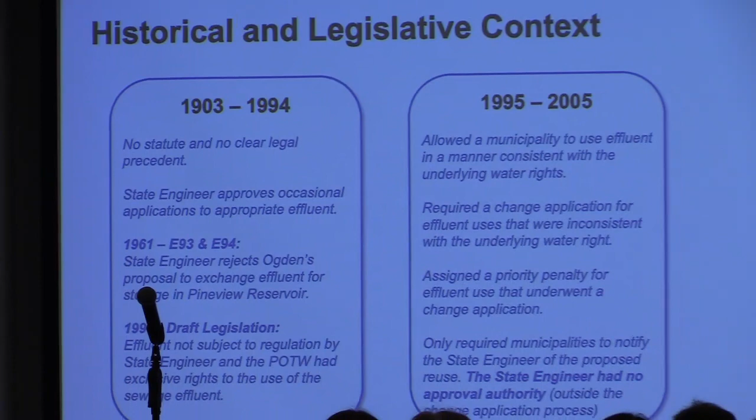If they wanted to do something different, if it was water that was coming from the underlying water right for a different use, they would have to file a change application. An interesting element of this law is that it actually assigned a priority penalty to that effluent use based on the date of the change application, if a change application was needed.

But the most important aspect of this is the state engineer had no authority to reject or approve these. It was simply the municipalities providing notice to the state engineer that they intended to do this, and then the state engineer simply published that notice. There was no authority for the state engineer to approve or deny anything along those lines. And that held in place up until 2005.

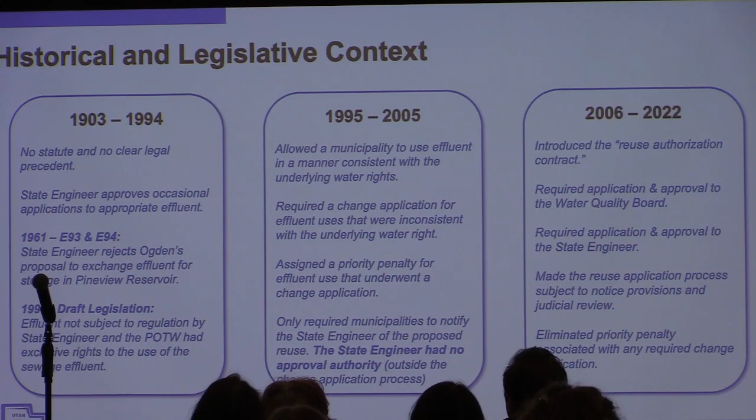So in 2006, a new reuse statute was implemented. It introduced this concept of a reuse authorization contract, which I'll discuss in a later slide. It required application and approval of the Water Quality Board at the time, and it required application approval by the state engineer. So you had two state agencies who were involved in the approval of these reuse applications.

It made reuse subject to the provisions of the typical application processes that the state engineer usually associates with appropriation, where they apply, the state engineer makes a decision, there can be reconsideration requested and go to judicial review. And then it also eliminated that priority penalty if there was a change application and simply just omitted that language.

So we had that from 2006 all the way up through 2022. And then the last legislative session, we had some pretty significant changes as a result of some of the things that were going on within the Great Salt Lake Basin. So a lot of the statute that we presently have evolved as a result of the discussions of that legislative session, where the Great Salt Lake was the key element that people were concerned about.

So some of the few changes: one, they changed the approval authority from the Board of Water Quality to the Division Director of the Division of Water Quality. Of course, I'll let Director Mackey address his role in that in a subsequent presentation. It did add an exception for reuse by industrial facilities. And then probably the more important provision is it prohibited both the Division of Water Quality and the state engineer from approving reuse applications that were filed in the Great Salt Lake Basin, with a few certain exceptions.

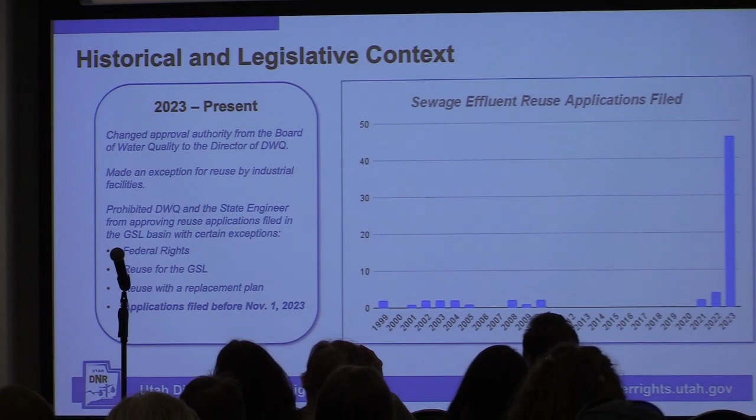So you can only imagine, here are the number of sewage effluent reuse applications we've received since the dawn of time. You can see it held pretty close to zero for most of the 20-year history, and then in 2023 we had about 46 of them.

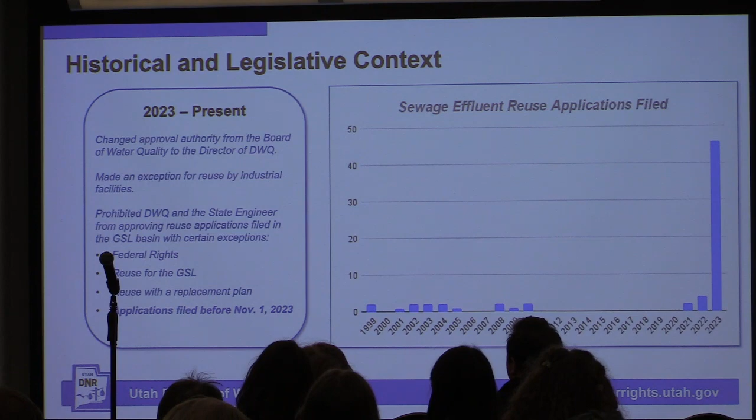So when I talk about incentives, you can see that there was an incentive for a lot of entities who may have had reuse on the horizon, but saw some of these provisions coming into place and saw that this might not necessarily align with how they intended to use that effluent. And so they all filed for reuse applications prior to that November 1st deadline.

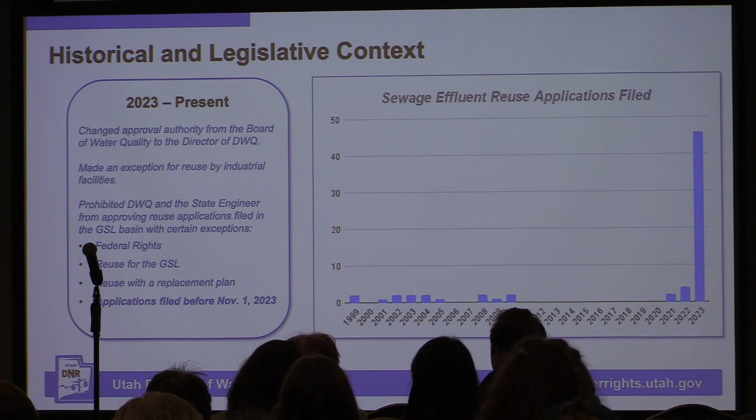So I'm going to walk us through the statutory provisions as it currently is today. This might be a little bit dry, a little bit more technical, but I'll try to hit the high notes on this, okay? And I'm just going to take it section by section.

All right, so there's a lot of definitions in section 102. I'm just going to touch on a few of them. First is the publicly owned treatment works. This is something that's been in definition for a while, it's also in definition in water quality statute. But what I want to key in on here is it's publicly owned treatment works, so these reuse applications don't apply to privately owned treatment works. It's got to be a public entity.

Water reuse project - I put this in here because I wanted to highlight the carve out for industrial processes. In essence, a reuse project means reuse for domestic wastewater that requires approval by both the Division of Water Quality and the State Engineer's Office, but it does not include water reused at or by an industrial facility for operating or processing purposes.

So if an industrial facility has effluent and they continue to reuse that inside their internal industrial processes, they are excluded from needing a reuse application. Public agency, again, I just want to highlight that private entities cannot apply for reuse authorization.

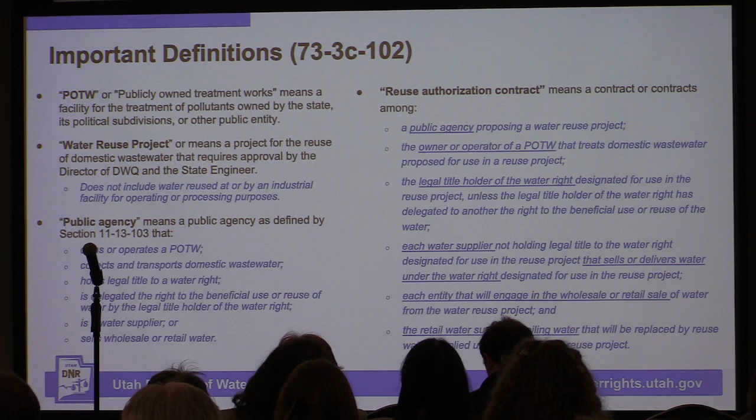Okay, moving on, water reuse in the Great Salt Lake Basin. This is a new component of the statutory provisions, and it essentially says the state engineer or the director of Division of Water Quality are prohibited from approving water reuse projects if the water related to the reuse project would have otherwise been discharged into a tributary of the Great Salt Lake. So you cannot do this if that water was going to the Great Salt Lake. But there are some exceptions.

And notice it says this section does not apply. Section 103 is important, it will come into play later on. These are the four exceptions: it does not apply to a water right owned by the federal government, a reuse project to supply water to the Great Salt Lake, a reuse project subject to a water replacement plan, or if the reuse applications were filed before November 1st, 2023, which was the catalyst for all of those applications being filed, at least for my foxhole.

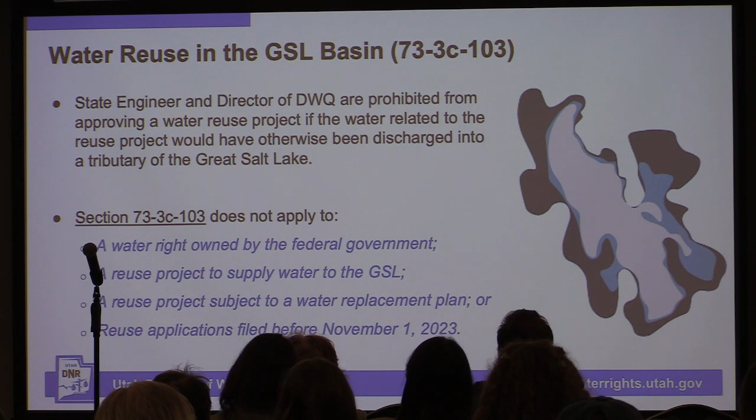So I think a lot of people saw that if we file our application before November 1st, 2023, we will not have to do a water replacement plan. And I think that was the understanding at the time when a lot of those applications were filed. So let's talk about reuse by owners versus contract holders.

If you're a public agency and you own the water right and the publicly owned treatment works, you can do a reuse application. The underlying water right has to be a municipal water right, and it has to be consistent with the underlying water right. There can't be any enlargement, and you've got to maintain the return flows. It's got to be approved by the state engineer and Director Mackey, and a change application has got to be filed if you intend to use it for something else.

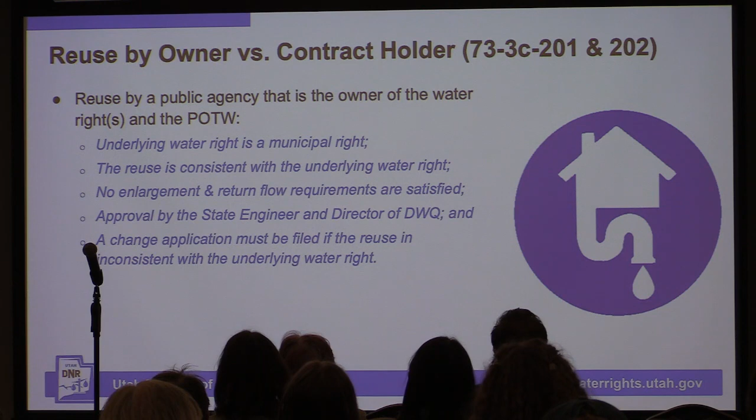The reason why that last provision is important is because we've had a lot of discussion about, well, if we want to reuse water for the benefit of the Great Salt Lake, we want to do a reuse plan to benefit the Great Salt Lake, a municipal right does not fit in the context of water to satisfy ecological purposes of the Great Salt Lake. So that's where a change application would be required in order to make sure the reuse was consistent with the underlying right.

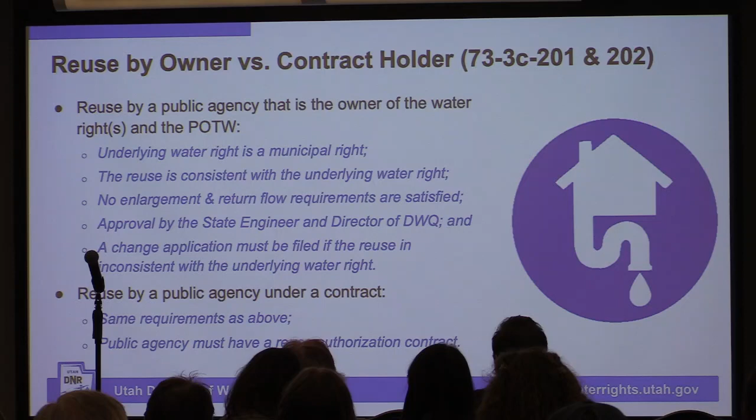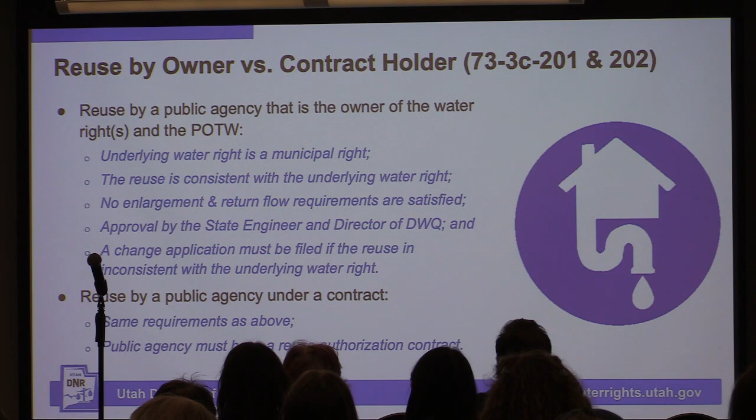And then you have a reuse by a public agency that's under a contract. This is where that reuse authorization contract comes into place. So if there's not unity of title between the water right itself, the treatment works, or who's going to be using the water, the service area - for instance, if you're a city trying to get reuse out of a treatment works and you're going to use it for the benefit of some other city - then a reuse authorization contract brings them all onto the same sheet of music so you all know what you're doing.

I am not going to spend a lot of time on this because Director Mackey is going to speak, but one of the provisions of this statute - and I'll give you my perspective - is that although it was drafted originally back in 2006 to make sure both water quality and the state engineer were on the same sheet of music, occasionally reuse permits were issued potentially without having a reuse application through the state engineer's office, and there was some confusion.

So there was this statutory provision that was modified that said the Division of Water Quality cannot approve a reuse permit until the state engineer has authorized it under this chapter. This just made clear the sequence of events applicants had to go through, the gates they had to go through. I'll let Director Mackey address his role in that.

Okay, so let's talk about application to the state engineer. The state engineer can - in the statute it talks about a condition, the approval is conditioned. And this is why it's conditioned: because we're going to approve it, but then it's conditioned that the Director of Division of Water Quality approves it as well. Sometimes applicants look for a loophole, thinking you have to get a conditional approval, then go to water quality, then come back to the state engineer.

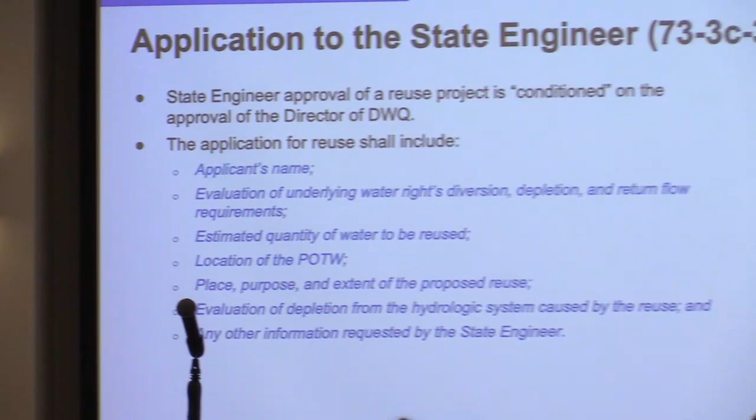Here is what the reuse application needs to have. A lot of the applications we received were missing some of these components, which resulted in us returning them to the applicants saying, hey, we are returning this to you, and if you don't fix it within 30 days, we will just consider it not filed. This generated a lot of concern, understandably so, from a lot of applicants, but it also helped us work with them through the process.

Some of the things are obvious, applicant's name, not a big deal, but I want to focus on estimated quantity of water to be reused. Obviously we need to know how much water you're going to reuse. We need to understand your portfolio of water rights. So when the state engineer approves applications to appropriate or evaluates a municipality's water rights, they have a portfolio of water rights, and in that portfolio they'll have a diversion limitation, but they also have a depletion limitation.

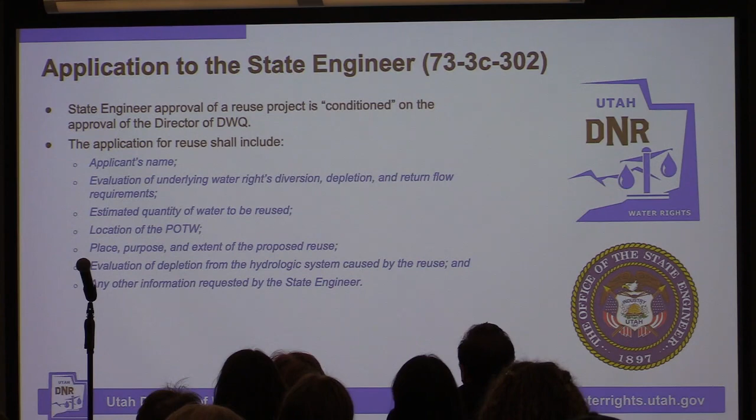Typically, when a municipality appropriates a new water right, they'll appropriate a municipal right, and we've generally considered those municipal rights to be 100% consumptive. However, sometimes they will take an irrigation right and turn it into a municipal right through a change application, and their depletion won't be the same as their diversion. So you'll have municipalities that have a portfolio where they have a lot bigger diversion than depletion.

The whole purpose of the reuse application process is for the state engineer to go through it and say, show us your portfolio, show us your actual depletion going on. You're diverting this much, how much are you depleting? Then we're going to compare that to your portfolio of water rights and say, of your authorized depletion, this is how much you have left to deplete, and we're going to use that in conditioning the approval of the reuse, just to make sure they're not going to exceed the depletion limitations of their portfolio.

A reuse authorization contract, we've already kind of touched on that. The state engineer follows typical application notice provisions, and then we issue an order of state engineer. It's subject to judicial review.

Here's the more important part that's more relevant to the Great Salt Lake, and I apologize, I'm doing this right at the end. I'll try to touch on the key points. So under this existing statute, you can't enlarge the existing rights, you've got to maintain return flows.

But also, again, we're in section 302 now, not section 103. It still has this requirement that if you're going to reuse water in the Great Salt Lake Basin, or use water that would have otherwise been tributary to the Great Salt Lake, you've got to have a replacement plan. So these are some of the issues we are currently working with a lot of the reuse applicants on, to say what a replacement plan looks like in order to keep the Great Salt Lake whole.

And obviously, you can imagine there's some concern from some of these municipalities who had this reuse bucket of water in their long-range plan, and providing a replacement plan to the Great Salt Lake doesn't quite align with what their plan has been. So there's been a lot of discussion on how to satisfy this provision of statute, and these discussions are ongoing.

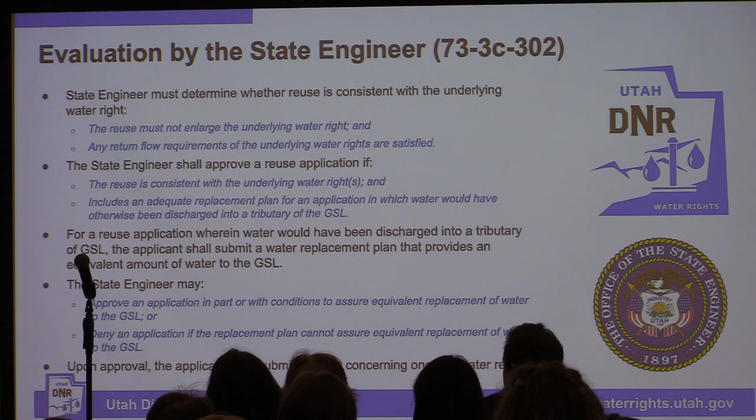And this is kind of the final bit. The state engineer can approve or deny an application for reuse, or we can approve in part, and we can condition these things, again, just to make sure that the statutory provisions are satisfied. And upon approval, the applicants are required to report all their ongoing water reuse, just to make sure they're not going to exceed those depletion limitations.

And with that, I think I'm done. And I think we'll save questions for the end, so thank you.

Sit right behind you, okay? Perfect. Okay, if you can't see me, you're lucky. Secondly, this is the second presentation out of 3 from an engineer. That makes you unlucky, because engineers are boring. We tend to think we know everything, and only one of the 3 of us do.

So, I was asked to talk about water reuse in the Great Salt Lake Basin, and Lynn called me up and said, I want you to talk about this. And the reason she did that is because I wrote a report on water reuse that started this whole thing going. And then I had to do a presentation to the Water Development Council, and they asked me, why are you here? And I said, because Representative Snider told me to come and do this. And they said, what is your ask? And I said, I don't know. It's his desire to have me here. And he said, well, the ask is going to be, we're going to change the law, which they did. And that started this whole ball rolling about what we're going to do with water reuse.

There's a book I read to one of my grandkids once. It was called Water is Water. And I'm going to tell you that water is water is water is water. So when we say reuse water, we're really just talking about water. And it's what people do with the water that makes a difference. In the case of reuse, there are lots of defined things that people say we're going to use it for. But it's just developing additional water for people to use. And the big one that really is kind of true, and one of the reasons people are doing it, is because it provides resilience for a reliable water supply. Because if we constantly reuse it, all we have to replace is what we lost. And so at least for home water supply, it's not all that bad of an idea.

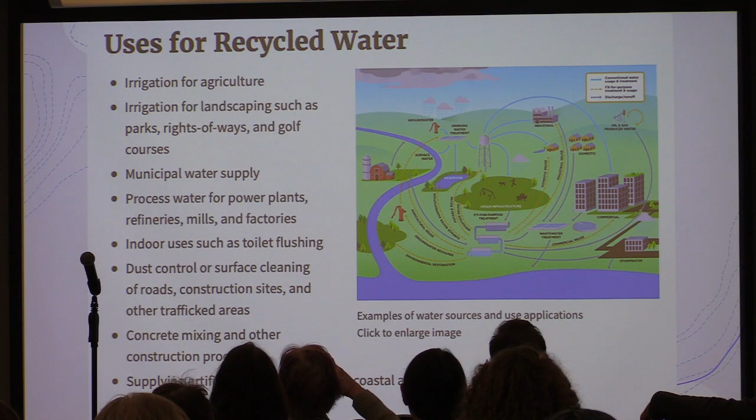Reuse can be done in a lot of different ways. And I would read this list to you if it made any difference, but I'm not going to. But I'm going to tell you that there are different types of reuse. One is non-potable reuse, meaning we're going to take it and treat it just well enough that we can stick it on your lawn, and if your kid runs through the sprinkler, they don't die. The second one is potable reuse. That's where we're going to treat it just well enough that you can drink it and you don't die. And then the last one is the kind of reuse that goes on all the time anyway, because most wastewater plants discharge to a water body that somebody else uses for water. So reuse is occurring.

There's a study done on the Mississippi that I read once. But I have to explain one more thing first: I am a sewer worker, and we have our own terminology. So if one of those terms comes out while I'm talking, it's because it's a professional term. If you don't like it, get over it.

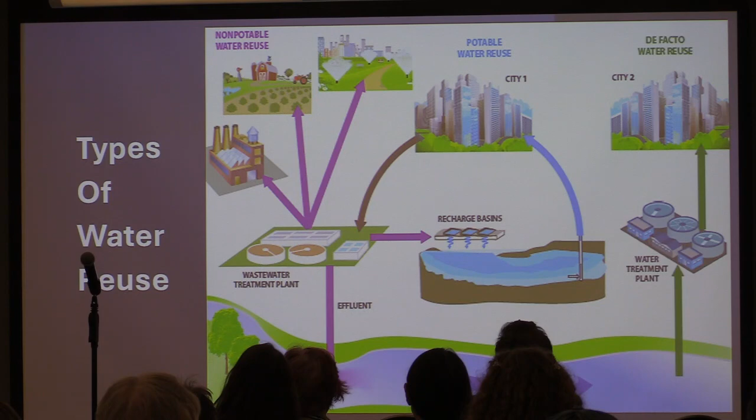Water is water is water is water. You're going to reuse water no matter where it came from if you need that water. So the favorite one is toilet to tap water. Now for most of you, that would be sort of gross, right? Except that study I mentioned said that the average individual living in New Orleans is drinking water that came out of the Mississippi River after it went through 7 bodies before it got to him or her.

Is the study real? Well, who cares, it made a lot of good reading. It's like, I listened to a study just a few seconds ago on groundwater seeping into the Great Salt Lake, and I've heard vastly different numbers of how much gets there. Wink, wink at Lynn over here. It's one of those things we just don't know yet, so people take a stab at it. And so 7 sounded like a good number.

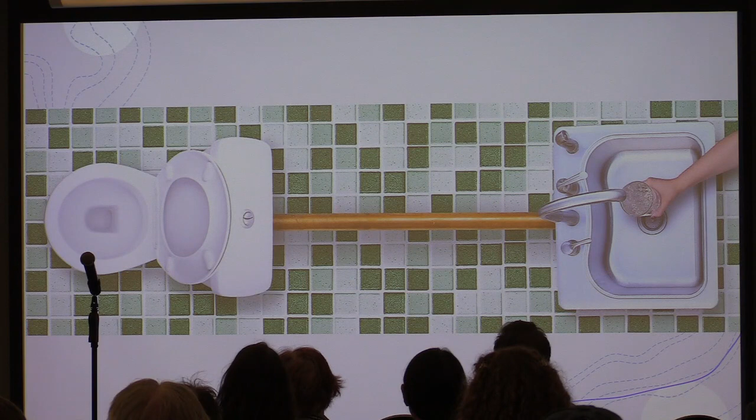But people don't necessarily like toilet to tap, but it's what's going to be happening and is already going that direction. Now, if we're going to do direct potable reuse, we're going to treat that water to a standard that makes it such that you're probably not going to get harmed by it. In Utah, we have no direct potable reuse today. Will we? I don't know. That makes sense if we want reliability of water supply, especially in extreme drought, but today it's not there.

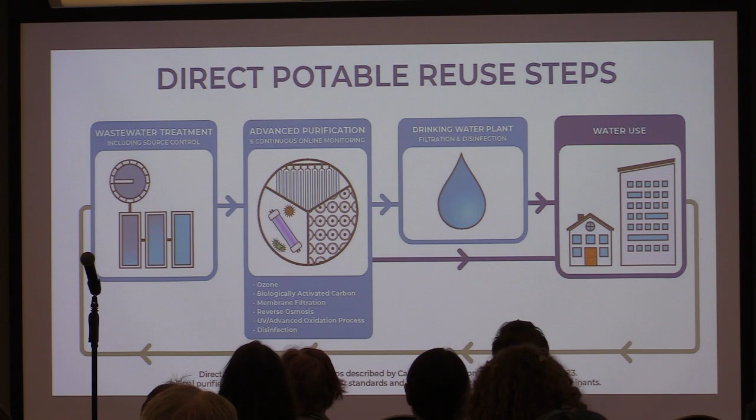How does potable water reuse affect the Great Salt Lake? Well, first of all, I got to talk about water people. Who in here works for a water district? Or works for a city in the water department? Okay, see, water folks, they live in a whole different world.

Sewer people, we're insignificant. Water people think they're gods, and they think that they are in control of everything. The example is if a sewer person, a water person, and a legislator are all in the same room, and you put them on a scale from the floor to the ceiling, the sewer person politically is 1 step above the floor. The legislator is at the ceiling, but the water people are 2 stories above that. They're the ones who think they make all the rules when it comes to water. And so they think that this water's theirs, and it's always going to be their right to use it.

And on the Great Salt Lake, well, that may or may not be beneficial. So a water person is going to do a lot of planning. I was on a board for a large metropolitan water district, and it was really interesting because they would talk about all the planning we need to do to make sure that we have a robust, resilient, and adequate water supply. Now, when I was listening to all those meetings, I was also working on Great Salt Lake, and I'm thinking, but shit, where are you talking about this water being lost from the ecosystem? I use that professional term again because I was frustrated at the moment.

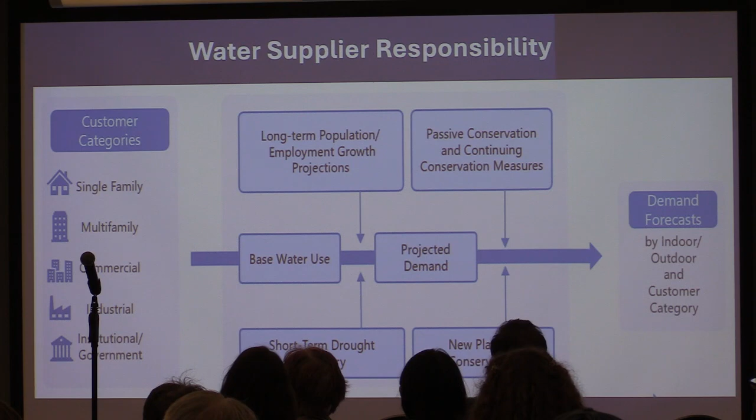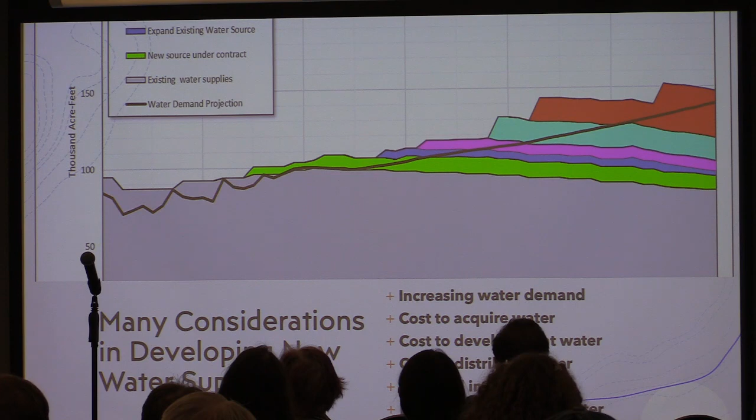So at the Great Salt Lake Advisory Council level, we decided we were going to look at modeling what happens to the Great Salt Lake based upon this, and you can read it if you want, if you've got good eyes. I just put it up there because it looked kind of cool. So we put together, and it was established, the GSLIM model, the Great Salt Lake Integrated Water Management Model, to see what happens with water.

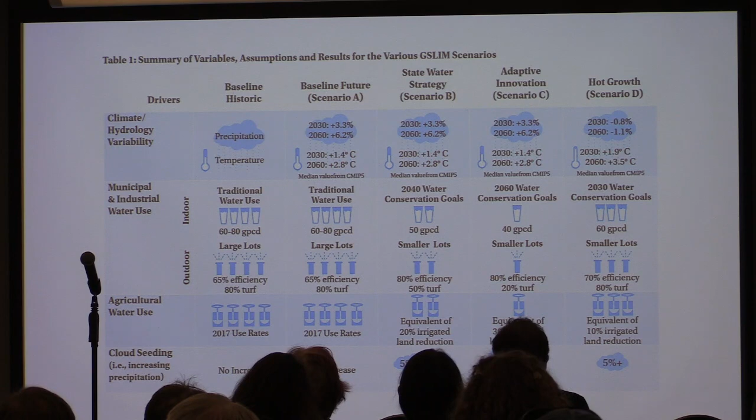We said we're going to look at different scenarios, and more importantly, what do those scenarios do to the Great Salt Lake? One scenario was how we're doing things today. Another was how we did it 20 or 10 years ago, because that was worse—we're doing better today. Then another scenario asked, what if we have continuous population growth and climate variability? For those who don't like the term, we just use variability. And what happens if we don't change anything and just have really significant growth?

If you look at this graph, the model, done in 2018, didn't really predict that we'd get worse by 2022 than even it suggested. But it showed we're in a real precarious place when it comes to Great Salt Lake elevation. That water level, no matter what we do, is not going to get a lot better. But by doing a lot, we can prevent it from getting worse.

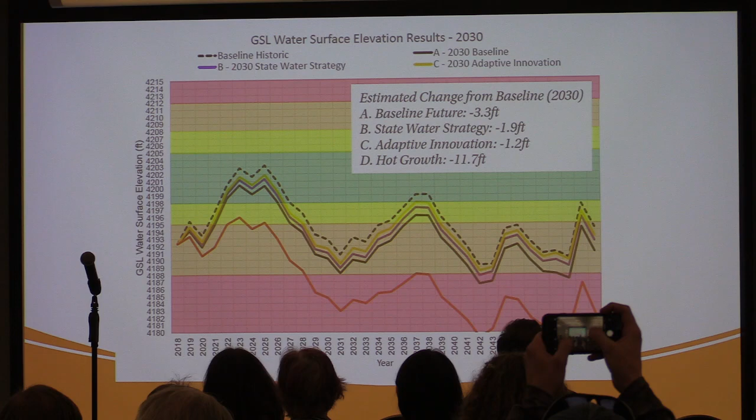That's when we started talking about what this means for water conservation, and also what it means for water reuse. I'll get to the impact of water reuse in a minute if you try to do it. But first I want to talk about conservation.

We did a study at the Great Salt Lake Advisory Council. It's really good because I can hardly see you if you were over here—then I wouldn't even have to know I was out of time.

So we did a study at the Great Salt Lake Advisory Council looking at water conservation—what levels of conservation are necessary. We went and worked with each of the large water suppliers and asked, what are we going to have to do? We had all these nice objectives, put it together, then looked at their water supply and asked, what does that tell us?

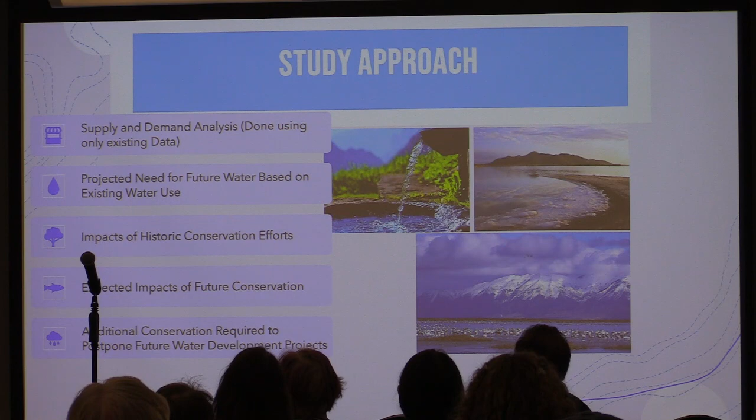So we said, tell us what it takes to live within the existing developed water supply—that would mean no new Bear River projects, no new reuse, no new water development, because that was the goal. If we can have population growth and the effects of climate change and still live within an existing water supply, we can keep natural systems at least consistent with where they are today—which is a good goal. Maybe better would be better, but at least that doesn't deplete it worse.

We looked at it from those who had potable water and those who had irrigation water, and asked what we need to do. We came up with a whole table of actions we have to take, but to make it simple: we need to convert every home to 100% water-saving fixtures.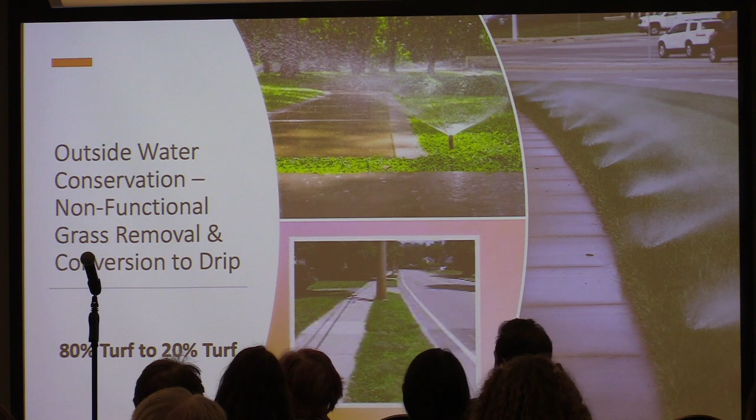If water reuse is allowed to remain in a natural system, that's good. But if water reuse is used to water lawns—and I don't know the exact haircut on water going onto lawns, but I've heard it's as much as 85% loss to evapotranspiration—that's bad for the Great Salt Lake.

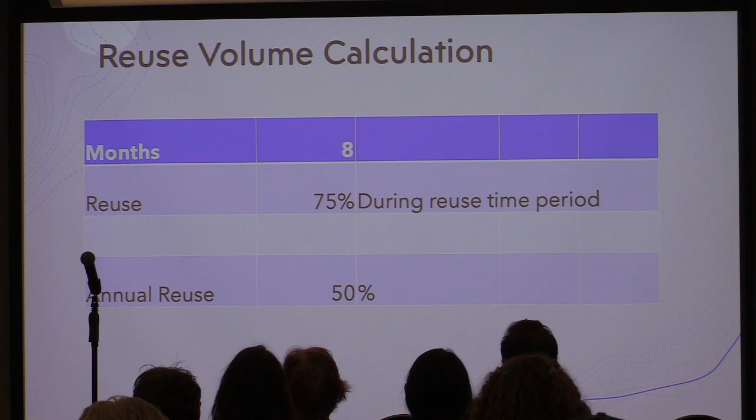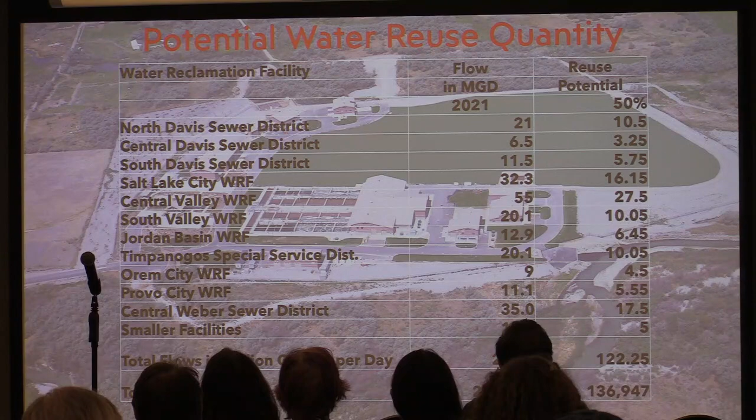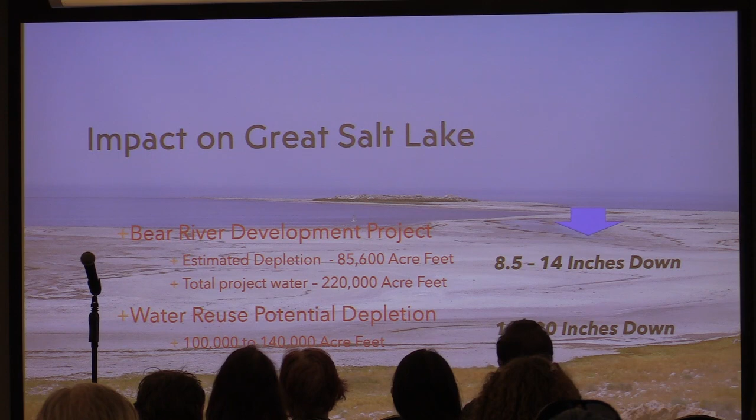If we calculate the available water today out of wastewater treatment plants in the Great Salt Lake Basin, and say that 75% of the time you can reuse some of that water, meaning we'd have an annual reuse of 50% only of the water coming out of a wastewater treatment plant, with 273,000 acre-feet today flowing into the Great Salt Lake ecosystem, that means you're going to lose 10 to 20 more inches of lake elevation on average, worse than the whole Bear River development project. So water reuse is actually worse for the lake than the Bear River project, which ain't good either. So what do we need to do?

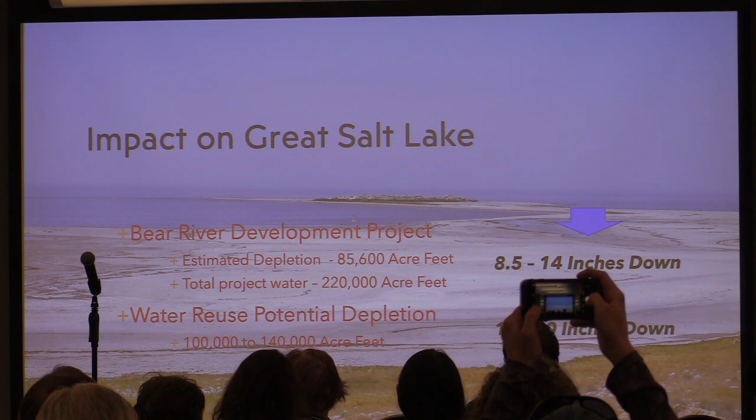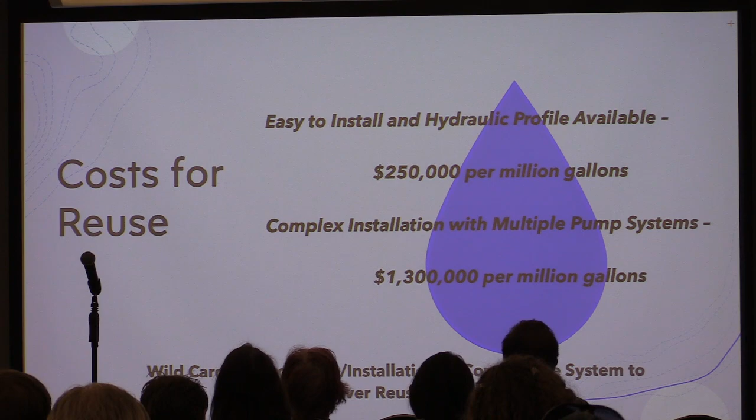There's a cost associated with it, and sadly that cost is actually cheaper than developing some new water supplies. So what we have to do is go to the win-win situation where we go to conservation.

So here comes the shaming part. If your yard looks like that, shame on you. Those of you who want to stand up and debate with me whether or not this perfectly green, not one stick of yellow grass, is the right way to keep your yard looking, I want you to do it now.

No, I don't see. Preach, Leland, preach.

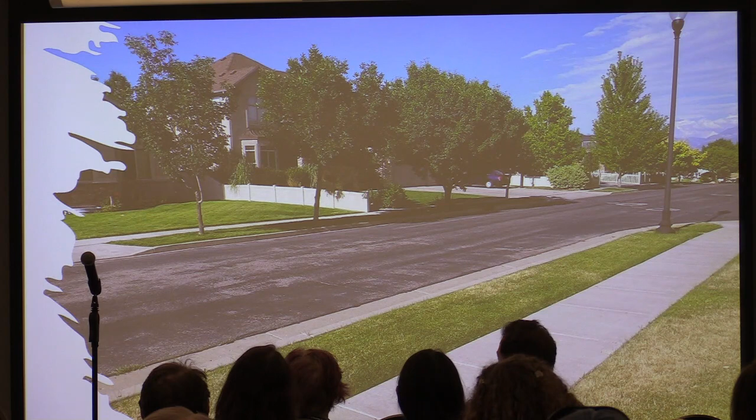So, wait a minute. We can stand it today like this, but we don't like it. So this person at least is not overwatering. Might get a few brown patches, but still, what are they going to do with that park strip except look at it? I bet you there's not one kid that plays soccer on that park strip. Not one. I'll bet you the only thing you might find somebody doing is using it to tee off golf balls at their neighbor's houses when they're mad. But beyond that, I don't know what it is.

This is a lot better. Now, sadly, I'm going to get to the point where those who represent cities should be ashamed, because they're telling us in many cases that there has to be a certain amount of green space and even a park strip. What are you going to use that green space in the park strip for? To make yourself feel good? No, this is better. This is good in your front yard.

But again, many of the cities have ordinances. Some of them reduced it. I know one large city that reduced it from saying you got to have 60 or 70% green space, we're all the way down to 30%. Well, maybe that's not far enough yet to reach those conservation goals we need everybody in this room to meet. So if you look like the first picture, then you got to consider, are you doing your part for the Great Salt Lake? Because as all those new people move in...

I live in Sugar House. Now, in Sugar House, if you've been there lately, it's like wall-to-wall new development of huge apartment blocks, right? If you've been in Sugar House, you'll know that.

But that's good because they don't have lawn. And so they might flush, but they're not going to use a lot of external outside water going into evapotranspiration. That actually for the Great Salt Lake is a good deal. It is not so good if I want to drive from my house to get anywhere anymore, but it is a good deal from the water use standpoint.

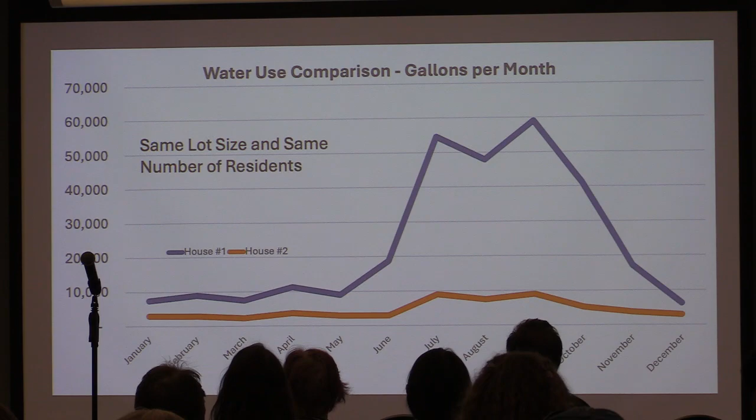And we need ordinances that force those who want the green grass to change if they won't change on their own. Now that's kind of draconian and kind of authoritarian. But if people are not willing to change, what are you going to do about it? It's like the water shaming in California when Oprah Winfrey brought truckloads of water in to keep her grass green. At some point, even the rich folks might have to cut back a little on water use. And it's doable - that's what this graph tells you, it's doable, because the bottom line used to look like the upper line. So you can do it.

Here's pictures I stole off the internet about changing ordinances, because this doesn't meet the current ordinance that house is in. Now, I don't know, is Erica Gaddis here today? I think the picture is actually Erica Gaddis there. So if you know Erica, tell her I used her picture on it. But the yard doesn't meet all of the ordinances that are in place today, and municipalities need to fix that.

The Great Salt Lake Advisory Council is trying to put together a toolkit. Where's Lily?

Lily over here is going to be putting together a toolkit to help distribute to municipalities, asking how far do you need to go? Because a lot of them don't see the need to go that far yet, because if you go back to that graph showing the water supply, they still have water.

But they won't in the future if we don't develop new water supplies, and developing new water supplies impacts the Great Salt Lake, full stop. There's been a lot of talk about agricultural optimization. We need that too, right? Because if we model it with a good degree of agricultural optimization along with significant home conservation, we can keep the lake stable and maybe even make it up to 4198 on an ongoing basis.

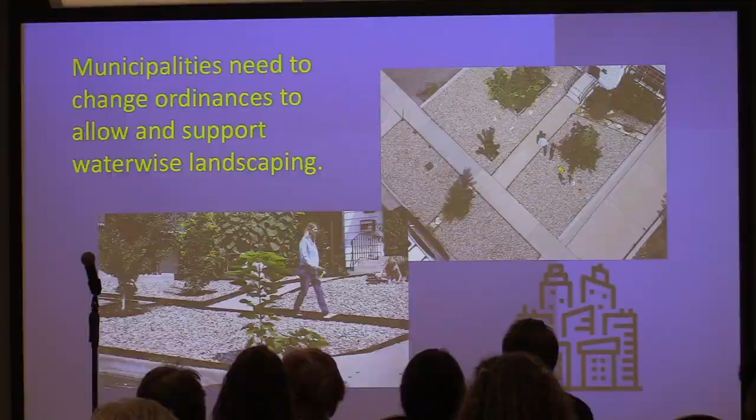So pictures of nice agricultural conservation - all of these things need to be done on par. Municipal and industrial M&I water supplies need to have conservation applied. That has to be done now, because new development is going to continue and we're not going to stop it.

There was another good friend - I don't want to use his name - who got up in a meeting and said, I know the problem with our water problems in Utah: we have too many children and we just need to stop it. And I'm going, all right, you're right there, but you just lost the battle. No one's going to listen to you on this issue. So that's not the answer.

The answer is reducing our usage to live within those water supplies. Number two, we need on-farm irrigation to improve the efficiency of the water that is used, so allow some of that to get down to us. And by the way, if you improve your efficiency, don't just open up new acres of land - let the water flow.

And then finally, saved water needs to be shepherded to the Great Salt Lake. That's been talked about enough today, but it's an important factor. It was in a legal analysis we did at the Great Salt Lake Advisory Council years ago, and today it's even more important in order to be able to measure how we save water. And with that, questions? If not, thank you.

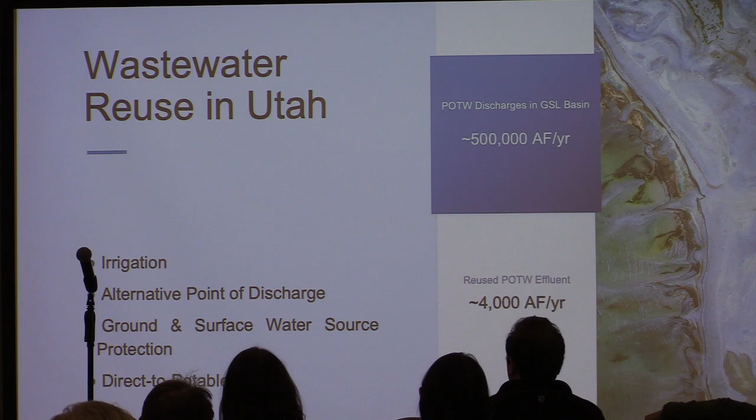There's a variety of different types of ways and reasons that wastewater is reused. Here's a list: irrigation, for sure, is the most common. We have this one that's sort of a term of art for us, called an alternative point of discharge, and I'll explain that in a second.

There are other applications or places where wastewater reuse, by definition, occurs for protection of surface water and drinking water sources, both surface water and groundwater sources. So they're a little bit odd. Most of those are in rural areas where septic tanks occur and put drinking water sources at risk. So when someone wants to develop, usually a hotel, in an area with pristine and limited groundwater, they look for alternatives other than gigantic septic tanks, which will inevitably contaminate the drinking water source. So they go to what is effectively reuse by surface disposal of the water.

Leland mentioned toilet to tap, direct to potable. There is interest in the state. Most of you probably know there's a pilot study put together by South Jordan. I believe they are approved, provisionally for lack of a better word, as a public water supply, so they can actually serve that water to transient populations as a demonstration. So it's not just theoretical—there is intention for some to move to that level of treatment.

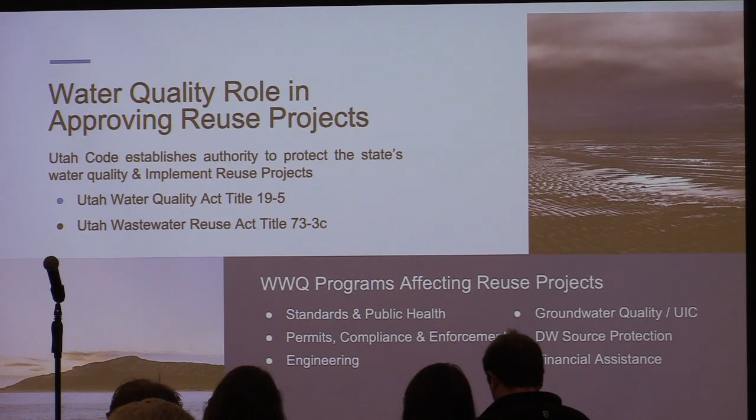With the new change that happened in 2023, we got a lot of clarity from that rule. It certainly slowed down the rate of new projects because people had to take a step back and really evaluate first their water rights situation. This is different from prior to the rule, where there were sort of parallel, usually conditioned approval processes between water rights and water quality.

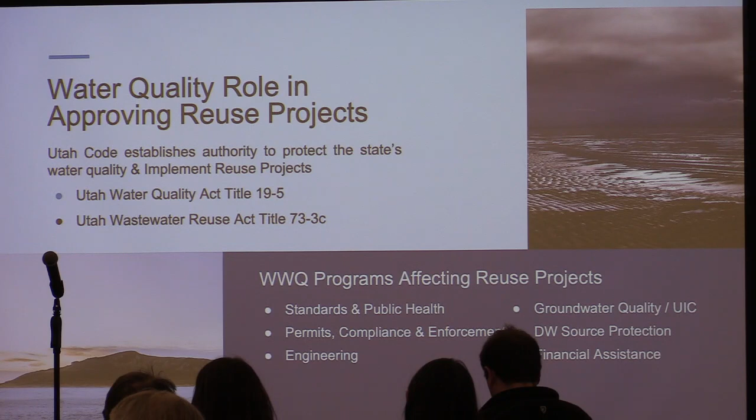We used to see projects all the time come before water rights had been proven out, certainly before there was any preliminary approval from the state engineer. This is just the way projects work - when an entity, a city, or a developer is interested in moving forward their project, they either take the path of least resistance and pursue that one, usually because they'd like to get their permits approved and then be able to get a bank milestone payment, or they approach them in parallel, saying, yeah, well, we're working on that, please get me my approval over here.

It's easy to get out ahead for one process, to get out ahead of the other process, and even though you might condition your approvals, sometimes things get legs, especially when you're approving construction and loans have been closed and people are ready to move forward with their process. We've had situations where we approved construction of projects before we had discharge permits implemented and got ourselves into trouble.

So the clarity that the new statute, the 2023 amendments, made is really important for us. It sets a structure for those who are interested in getting approval for their processes. This is how you do it. And we like it. We don't have to do all the work that goes into a reuse contract, to ask all those questions. All that work gets sorted out by the state engineer.

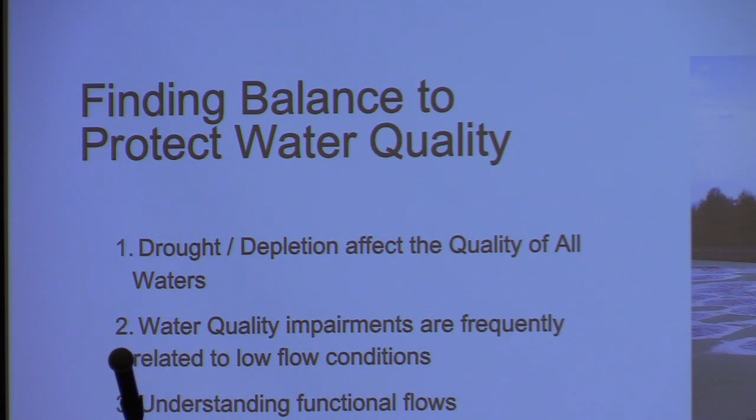I thought the speaker's mention of balance was good. I liked hearing him mention all the major important interests in Great Salt Lake: mineral companies, communities, agriculture, and environment. And I thought it was nice that the speaker recognized that in the 1960s, our appreciation for the environment and water quality and its ecosystem wasn't really recognized.

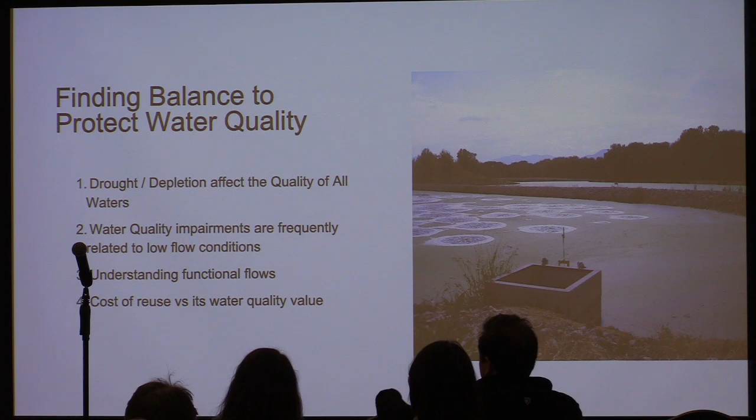And we've come so very far throughout society, throughout the public, and all the way up through the legislature to recognize the importance of the lake. So as part of finding balance, I think it's fairly obvious to everybody that we all recognize depletions and drought have a harmful impact on Great Salt Lake. I hope you also recognize they have an adverse impact on almost all of the state's waters. We find that as we assess waters across the state, the single largest category of water quality impairment is dissolved oxygen, temperature, and pH.

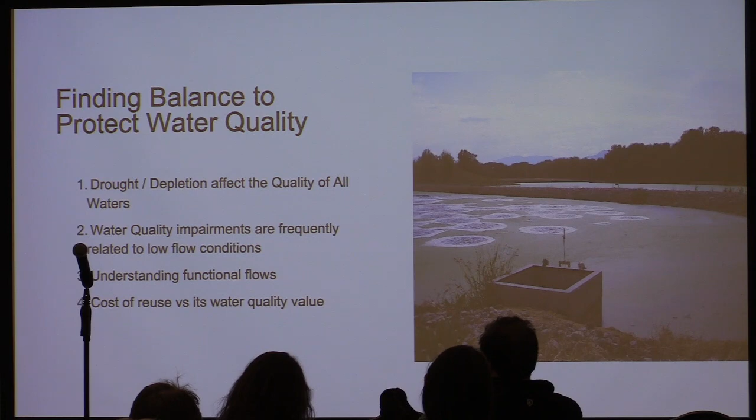There are more impairments there in both lakes and rivers than any other impairments, metals, anything else. A lot of those impairments are in cities too, but because of the number, a lot of those are out in the greater state. The reason is that when we have drought and high levels of depletion, there's less flow in the streams, lower levels in the lakes, they get warm, and the dissolved oxygen can't be maintained for habitat. So this challenge we have with the Great Salt Lake on flow is ubiquitous across the state in all our waters.

Part of what I know the HB 429 study is looking at, maybe it's a small part, but I think it's a really important part, is functional flows. I'm not sure I could really explain exactly what functional flows means, but kind of the bottom line is when we dry up streams, they aren't functional for any of the uses. There are minimum levels of flow in streams that should be maintained so that all the beneficial uses can be met.

I think it's really great to see that the state is looking into understanding functional flows better. I think functional flows will help the POTWs as well. When a POTW is the stream, because the stream is just a trickle, they get much more stringent permits because they are the stream. There's no accounting for attenuation of pollutant loads in those streams when you basically are the stream. So having good, healthy streams also helps us manage our wastewaters in a better, more healthy way.

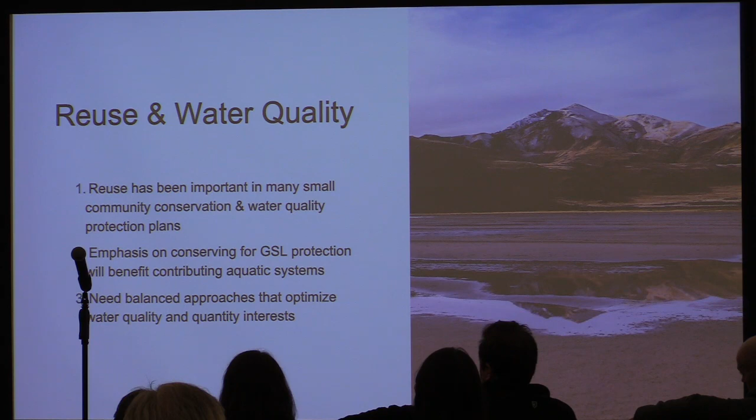I appreciate the emphasis on conservation, Leland, thank you for protection of Great Salt Lake, and I think in so doing, we are going to benefit other waters as well. The tributaries that will be delivering that water will be more healthy as a result of conservation. And of course, the need to balance costs and water quality with water quantity needs. And that is it.

I'm going to talk today about cloud seeding in Utah - what's been going on, how this past season went, and what's ahead of us down the road.

Why do we cloud seed in Utah? Well, it's new, affordable water production - some of the most affordable new water you can have. Also, we have very complex and diverse terrain, which allows for a lot of supercooled liquid water to occur within our clouds. You get a very rapid updraft along the front ranges of the mountains, which transports these water droplets into the freezing level of the atmosphere too rapidly, so no freezing occurs.

The droplets become supercooled, and we have a lot of issues with that. No ice nucleation takes place because we don't have a lot of CCNs, or cloud condensation nuclei, and we also don't have the droplet sizes that allow for growth via collision and coalescence. Because those droplets are very small, the surface area isn't big enough for freezing to occur, and when they collide with each other they tend to just bounce off one another, so the clouds become very inefficient. As we'll learn tomorrow afternoon, dust particles are very hydrophobic in nature, so they aren't collecting the water droplets we want, making the clouds even less efficient.

And of course, water demand is increasing, and climate change, or climate variability, as Leland said earlier, is an ongoing issue here in Utah.

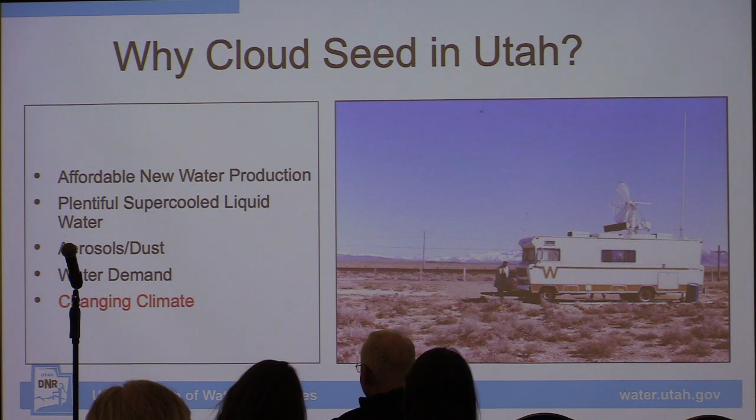Looking at the snow water equivalent for the past 30 years as a percent of normal, you can see there's a lot of variability. In fact, over the last 30 years, we only had 2 years where we were within 5% of normal - it's feast or famine. With cloud seeding, we need to take advantage of big years like this past year and last year, because resources are much more readily available. Those are the years we can try to bank that water and get through some of the low drought years, in order to continue providing sustainable water.

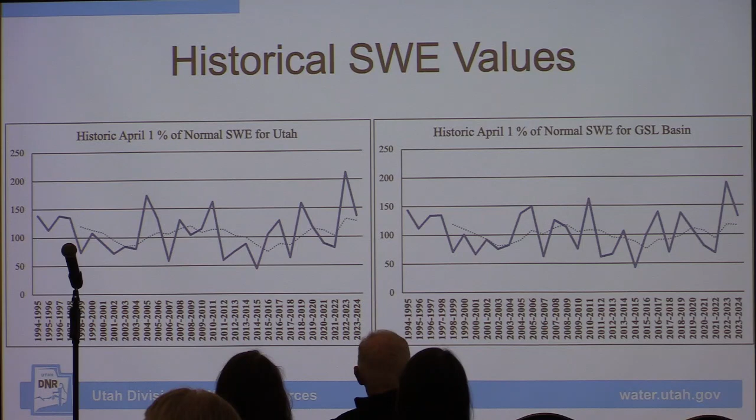Before I get into the methodology, I want to talk about the materials used, because this is always the first question we get. The main material we use in Utah is silver iodide, and structurally it's very similar to an ice crystal, so when it comes in contact with that supercooled liquid water, it turns into ice. You have to have temperatures around -5 Celsius to -20 Celsius for that to occur.

This is used both in snowpack augmentation, which is what we're doing here in Utah, but also convective cloud seeding, which is ongoing in North Dakota and Texas.

There's also a program here in Utah that uses liquid propane, which creates a burst of evaporative cooling. What's really cool about this is it freezes everything almost up to that 0 degree level. So all the super cooled water in there, it doesn't matter about the temperature, it's going to freeze. The issue is the burst is typically a smaller dispersion, so you're not going to affect as large an area as with silver iodide.

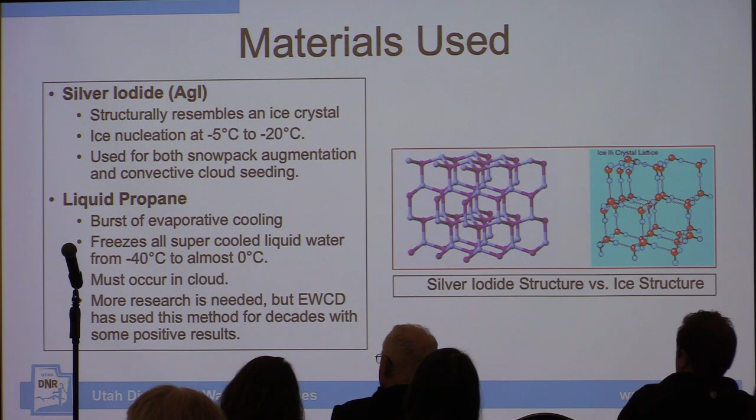And you have to do it in cloud, you can't be below the cloud. More research is needed in this, but the Emery Water Conservancy District has been doing this for decades, and they're seeing some positive results. We're talking with a group in Idaho that's doing a research project on this, and hopefully we can learn a lot more about liquid propane.

But of course, the big question is the environmental impacts of silver iodide. Fortunately, silver iodide is insoluble in water, so it hangs on to that free silver ion, which is the toxic part of silver. When you combine silver with iodide and look at the electronegativity of the two, you have a covalent bond that takes place, so the bond is about 0.49. If it's above 1.5, it starts being soluble in water, and then it starts to get pretty bad.

But the maximum concentration of silver in water when it's silver iodide is 0.984 micrograms per liter, which is below the background materials we've already observed in states like Nevada, Idaho, California, and Utah. It's also below the limits for safe drinking water, which is 100 micrograms per liter, aquatic life at 4.1, and terrestrial plants at 10 to 100,000 micrograms per liter.

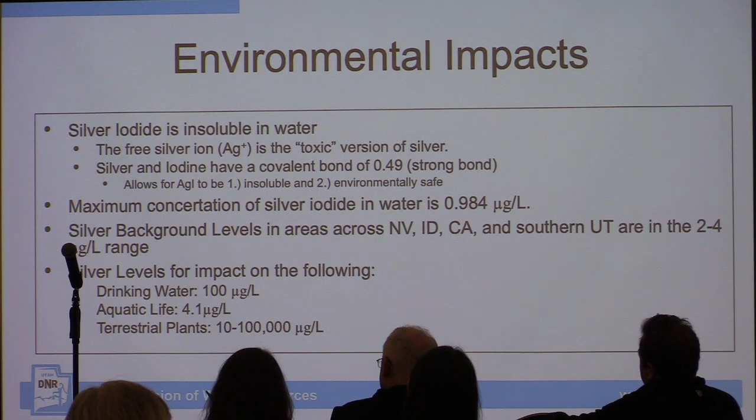But really, the biggest evidence that we have that this is safe is longevity. We've been doing cloud seeding in Utah for 50 years in some areas, and we are still seeing no impacts.

So we'll talk about the methodology. Here in Utah, the biggest form of weather modification we do in cloud seeding is via ground-based generators, and here you can see one of the new remote generators. We rely on orographic lift to transport the material over to clouds, and we get a really good dispersion from these generators that affects a large portion of the cloud. We have many of these generators well placed throughout the state to target the areas we're working.

For seedability, again with silver iodide, you need that temperature, -5 to -20, and you have to have favorable liquid water content, anything over 0.5 to 1 grams per cubic meter. No blocking flow, no stability issues, you want to be able to see that dispersion go throughout.

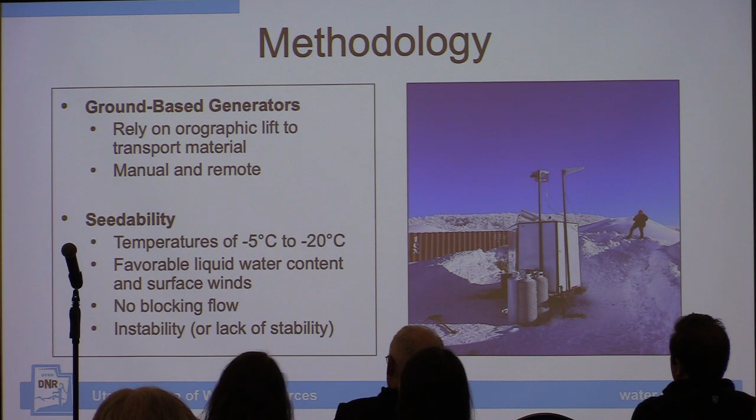But if we do have blocking flow and some stability issues, we have a second way of cloud seeding, and that's our aerial programs, which are very new here in Utah. We're taking aircraft, flying in the cloud on an IFR flight path—for non-pilots, that's instrument flight rules. What's going on there is the pilots can't see anything outside, so they are working just off of their instruments.

You can't have icing conditions because then the plane would crash, so we have to be very careful with that—pilot safety is, of course, number one. Then, targeting in cloud, we do have ejectable flares where we could get above the cloud if we are experiencing icing. Just like little shotgun shells, they'll shoot the flare down into the cloud, and it takes about 45 seconds to burn as it gets into the cloud.

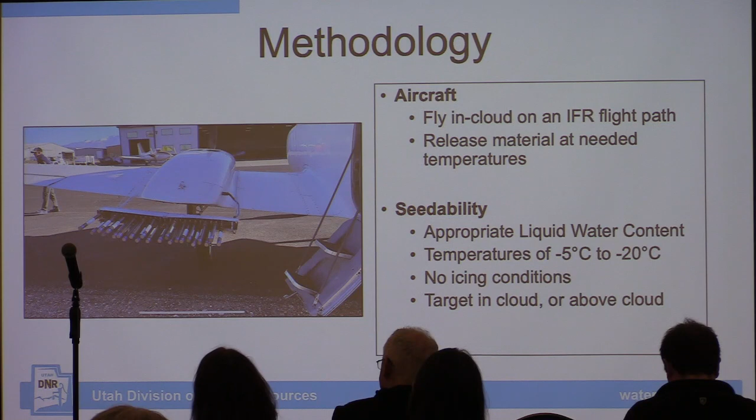So it gives us a little flexibility to not only address that stability issue that blocks flow, but also during the early and late parts of the season, we could be a lot more precise with the targeting.

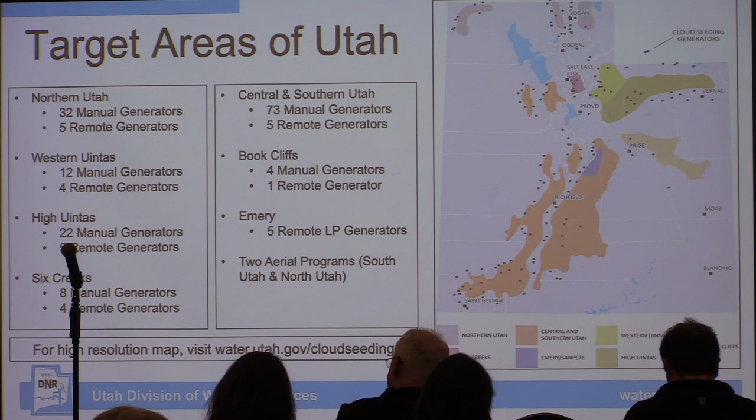So here are the target areas of Utah. We currently have 7 programs across the state. You can see all the generators - those are the manual generators, mostly on people's properties, and the meteorologists call them up and say, hey, we have a good storm coming in, could you turn the generators on? Then when it's over, they call them and ask them to turn it off. But this year we were able to deploy 24 new remote generators, sited in more remote areas, and the meteorologists could just turn them on via a program on their laptop.

So we have 24 out now. The plan is to get another 30 to 40 out this next season. By the end of our 3-year plan, we're hoping to have anywhere from 120 to 160 remote generators, supplementing the manual generators. We're trying to increase the density of the network, expand our programs, and make everything else work much more efficiently.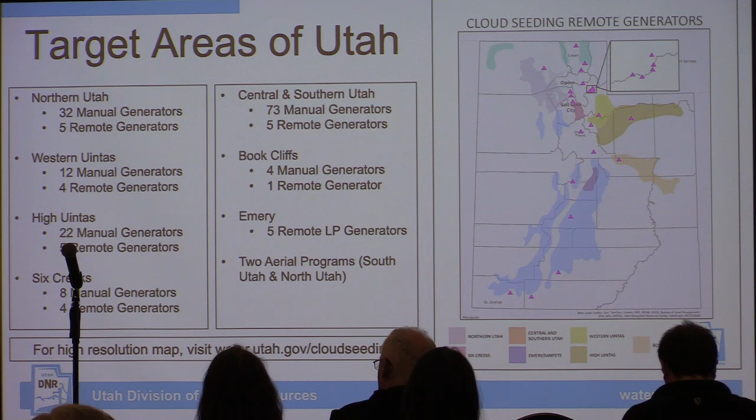And then Radiometrics, they're providing us with some radiometers we're going to use to look at the liquid water in the clouds. We're also doing a project trying to bring gap-filling radars to the state of Utah so we can start seeing these storms in better coverage.

So not everybody could come to Utah and just start cloud seeding. We do have a licensing and permitting process. To achieve a license, you have to have a bachelor's in meteorology or a related field, 5 years of cloud seeding experience, or experience that the cloud seeding coordinator thinks is enough to receive a license.

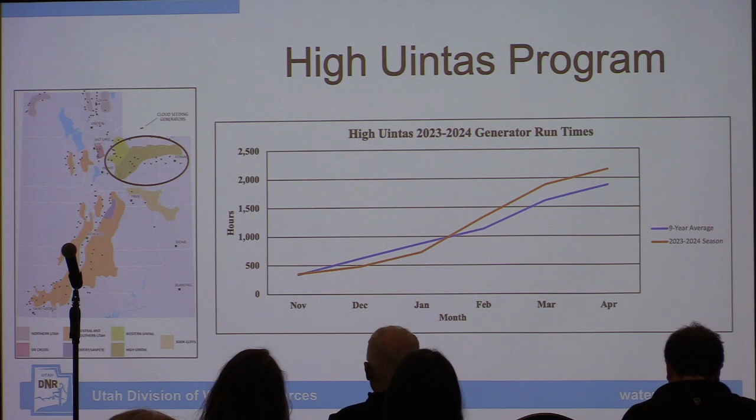But from program to program, we're going to look at the High Uintas program. The blue is a 9-year average, and the orange is what occurred this season. You can see things were pretty slow to start the season off, and then things really picked up in mid-January, right when I moved here. So the Six Creeks program, that's the one just up the road from us.

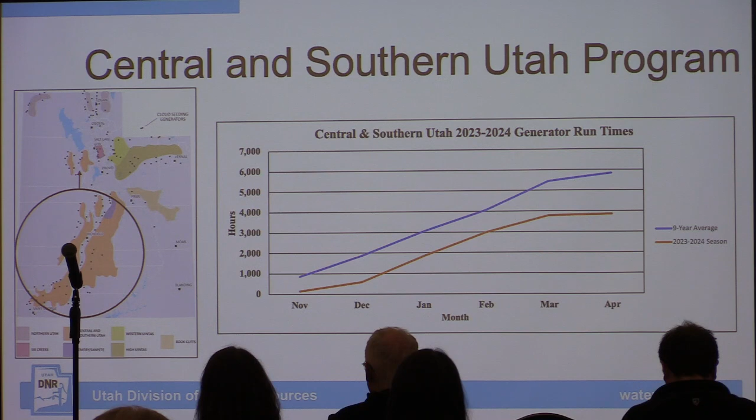They also had a really good season. Central Southern struggled a bit this year, although their snowpack was great. There were a lot of issues with the wind flow - we were getting more parallel winds to the mountains as opposed to perpendicular winds. So the program didn't run as much as we had hoped it would have.

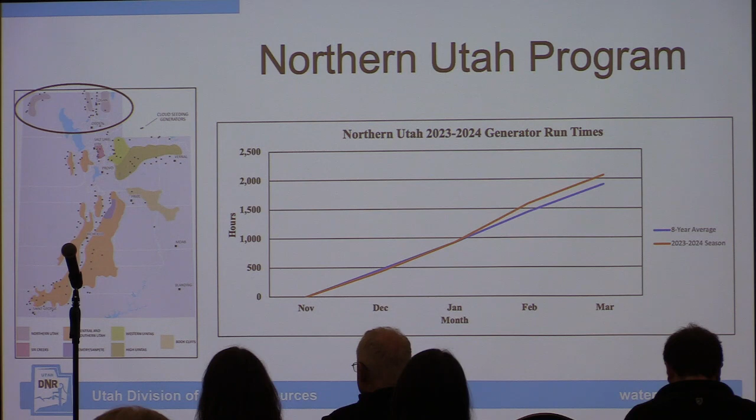And then, of concern here, the Northern Utah program was right on pace up through the end of January when it started to do a little bit better. And then the Western Uintas program had a pretty good season. These are all from the manual generators too, so nothing here from the remotes. We'll get to that in a second.

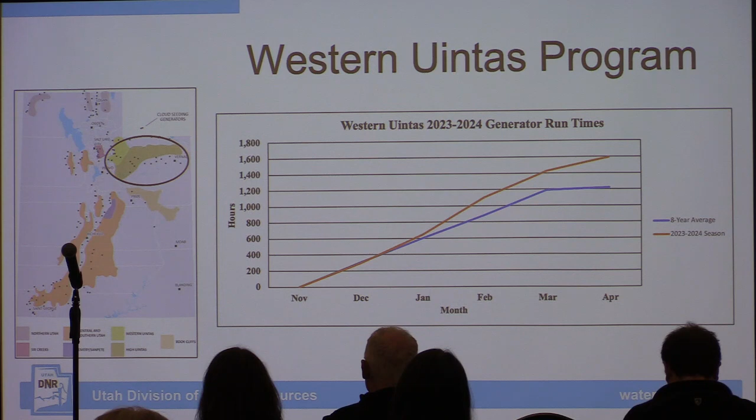The Book Cliffs program is pretty new. We don't have a whole lot of consistent reporting with that just yet. And then Emery as well - we're trying to work with getting some better reporting out of them, something that I'm certainly going to help them with.

But going back to the state-owned generators, I left the X up there because I was still waiting to get the report back, and I did get it back this morning. So the 24 remote generators that the state owns ran for 2,200 hours, which exceeds my expectations. I was thinking they would run maybe 50 hours a generator, but they were close to 100 hours per generator. January and February alone, they were very busy - 985 total hours just in those 2 months.

There were some questions about how these would do out in the elements. Well, we had one generator that had a foot of snow over it, and it still ignited remotely and was able to produce for us. So we're seeing proof of great reliability. The only issue we had was one of them did get blown over in a windstorm, but that was a minimal issue. So we're creating a higher density network of these generators, and the expansion is going to continue into next season.

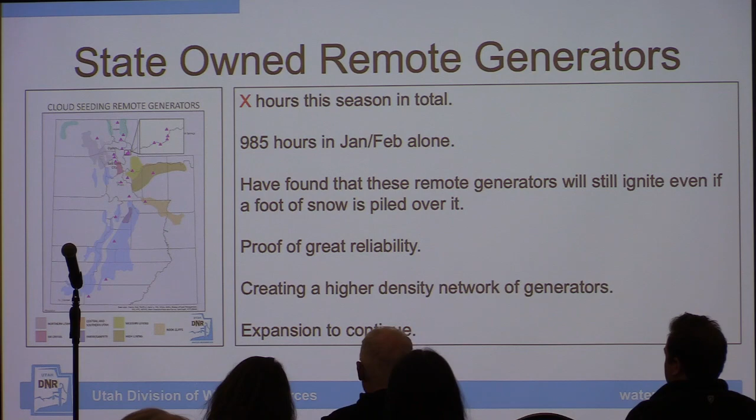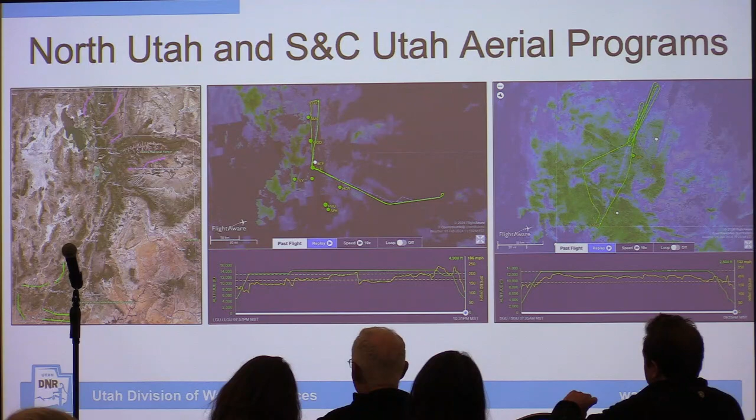So just being able to watch that has been a good experience, and we're going to refine a lot of the aerial program. This was only the second year for St. George, only the first year for Logan. So there's still some work to do with the aerial programs.

So of course, what do you get out of this? That's the hardest question to answer in cloud seeding, because natural variability is a big deal. However, the contractors at North American Weather Consultants do a great job of doing a target and control evaluation. This is a long-term target and control evaluation, and in order for one of their control areas to be matched with one of their target areas, they have to have a correlation of 0.9. So it's actually a pretty high correlation.

Over that long-term period, we're seeing about a 6 to 11% increase in precipitation, and that equates to about 200,000 acre-feet of additional stream flow. About 55 to 60,000 acre-feet of that is happening within the GSL Basin. The benefit cost analysis, if you look at an acre-foot of water being worth about $100, that's probably a gross underestimate - that's about a $20 million return in just stream flow alone. And if you say we're about 50% off, then we're still seeing about $10 million in economic return. So this is some of the cheapest water you can get outside of conservation.

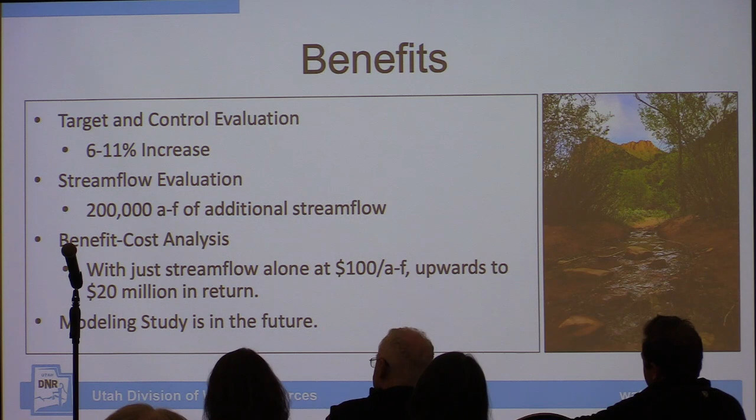We are planning to do a modeling study to look at some of these target and control methods, to make sure that what the contractors are giving us lines up with the models. So we're excited about doing that here soon.

The short-term strategy for Utah is to continue the expansion of remote generators. The Utah Climate Center is doing a feasibility study, which will be wrapped up in the next couple of weeks, looking at the feasibility of the Ogden and Provo areas to start expanding target areas there. We also want to review the aerial programs to find out what challenges we had and how we could possibly overcome those.

I've already talked about the radiometer purchase, but there's also the environmental study. We want to do that environmental work here in Utah and make sure the numbers align with what is going on in other states.

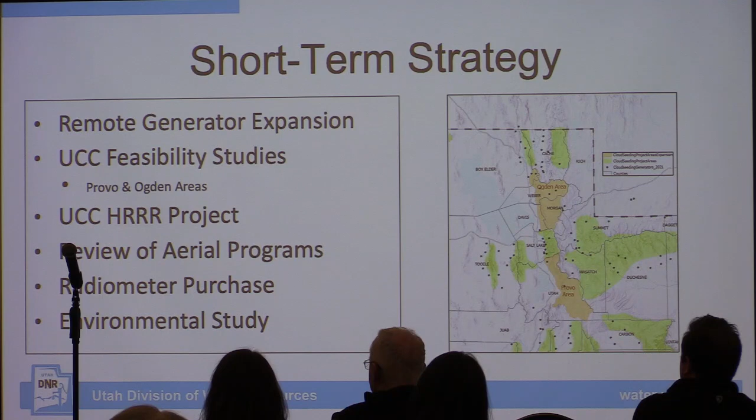For the long term, we want to look at creating a cloud seeding research advisory committee to make sure the money the legislature has provided is being used wisely. We want to look at different feasibility studies, not just in the winter, but also a potential convective study. We're looking at new and different seeding agents, although silver iodide is king right now. And then a multi-year research campaign looking at better targeting and dosaging practices, exactly where to put these generators, and of course the evaluations of the programs.

That is all I have today, but I am open for questions. I'll stick around after, and I'll certainly entertain questions. Thank you.

We have 5 whole minutes for your burning cloud seeding questions.

Question: for the lower Colorado Basin contractors, if they're donating their money to DWR, does DWR determine where the money goes? Answer: With the lower Colorado River Basin states, there's a technical committee for the cloud seeding programs. We give a proposal, and then we determine where that money goes, but it's only for the lower Colorado River Basin, targeting anything that feeds into the Colorado River.